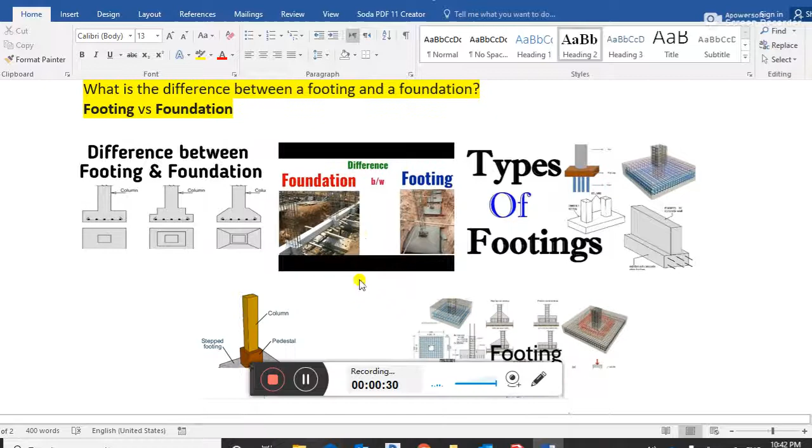Guys, today I also want to discuss a very important component of building construction called footing. This video is also very important, and as time goes on, this becomes a very interesting topic. Let's talk about footing. What is footing?

Footings are an important part of foundation construction. They are typically made of concrete with rebar reinforcement that has been poured into an excavated trench. The purpose of footing is to support the foundation and prevent settling. Footings are especially important in areas with troublesome soil.

Guys, we came to know about the definition of footings and its importance in the building. This is a very important element of the building. We should know this because most people mix up foundation and footings, not knowing the difference between the two.

Now it's clear the footing is an important part of foundation construction. They are typically made of reinforcement rebars that have been poured into the excavated trench. The purpose of footing is to support the foundation. Guys, this is an important term.

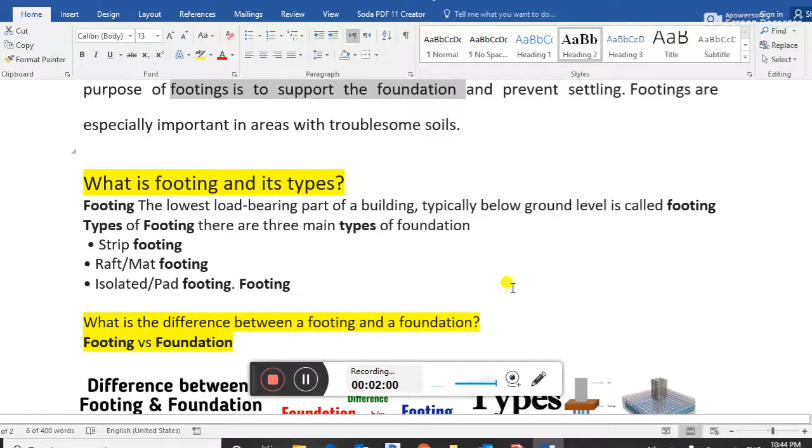What is footing and its type? Footing, the lowest load-bearing part of the building, typically below the ground level, is called a footing.

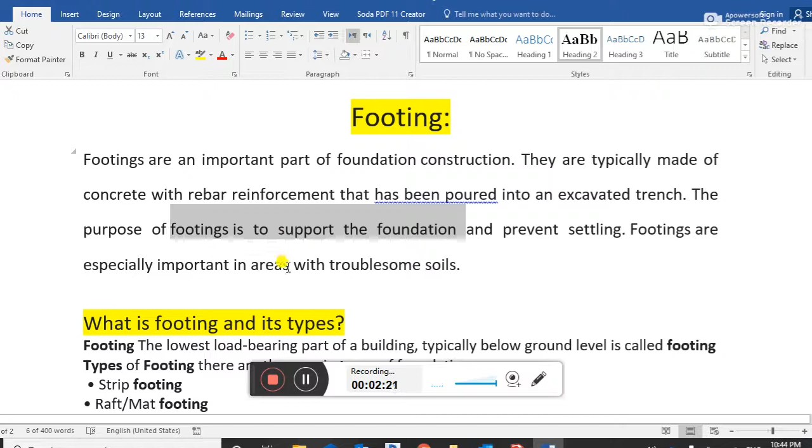As I previously talked, the footings support the foundation. This is also the lowest load-bearing part of the building, typically below the ground, called a footing.

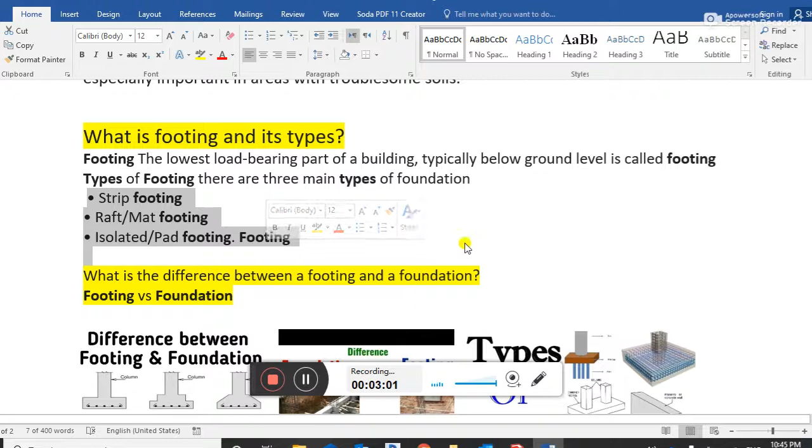Types of footing: there are three main types of footing or foundation: strip footing, raft or mat footing, and isolated or pad footing. Guys, these were the three types of footings - strip footing, raft/mat footing, and isolated or pad footing.

Guys, what is the difference between footing and foundation? Or in short, footings versus foundation difference.

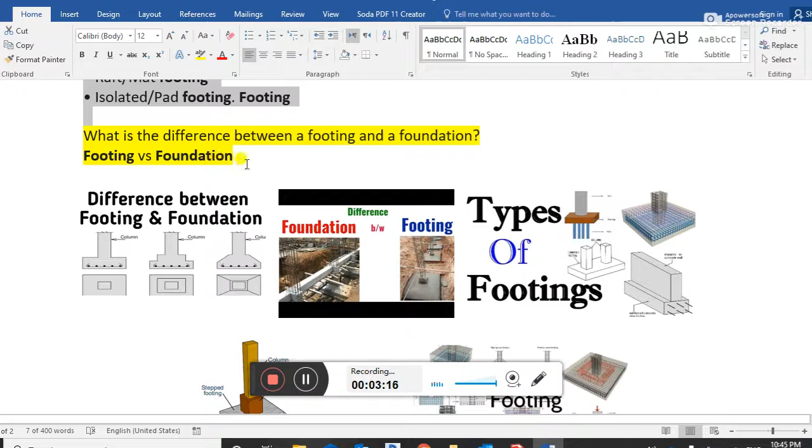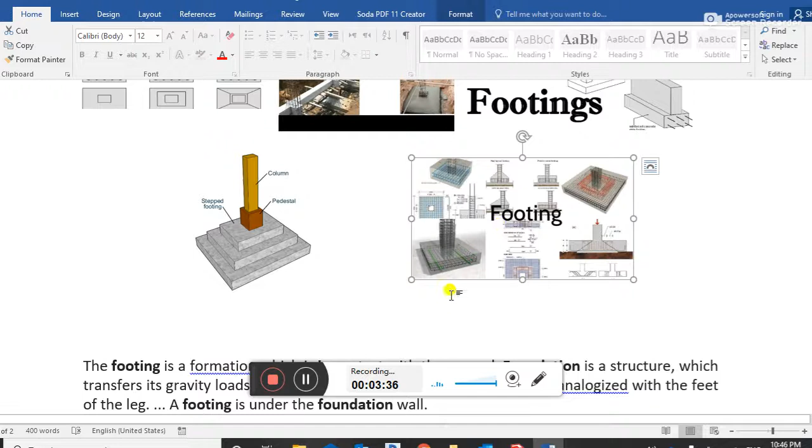Guys, as you can see here, this is a stepped footing, like a stair, stepped footing. This is pedestal, column, pedestal, and this is a column. This is also an illustration of footings, you can see here.

This is a footing, this is also a footing - all three. Here we have types of footings. See, this is a footing, this is also a footing, combined footing. This is all our footings.

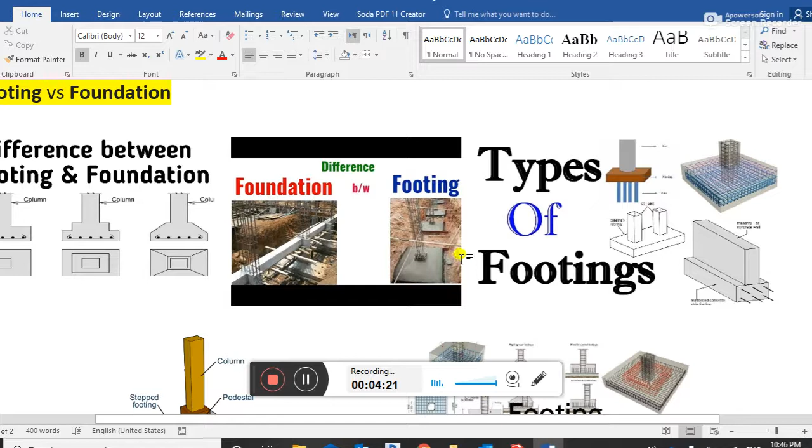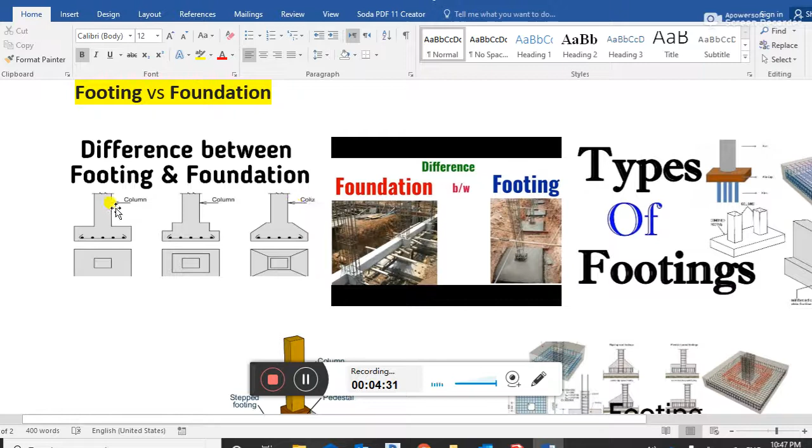This is the difference between footing and foundation. This is footing, guys, and this is foundation. Footings are support for foundation, as per definition. We can see this is a column and this is the footing.

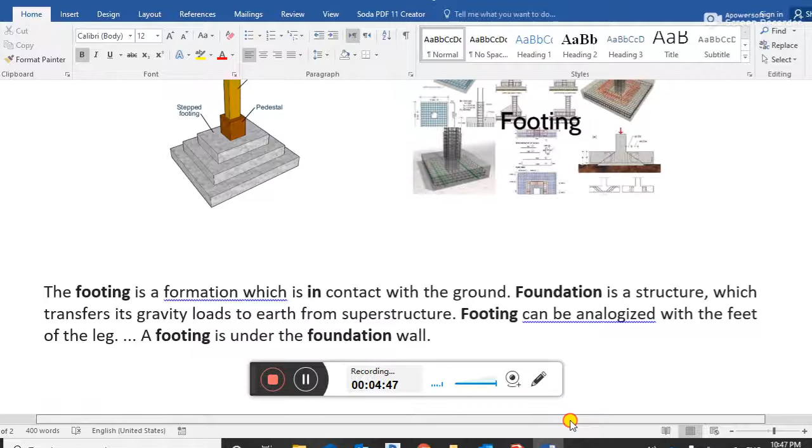Guys, we jumped into another part, which is: the footing is a formation which is in contact with the ground. Foundation is a structure which transfers its gravity load to the earth from the superstructure.

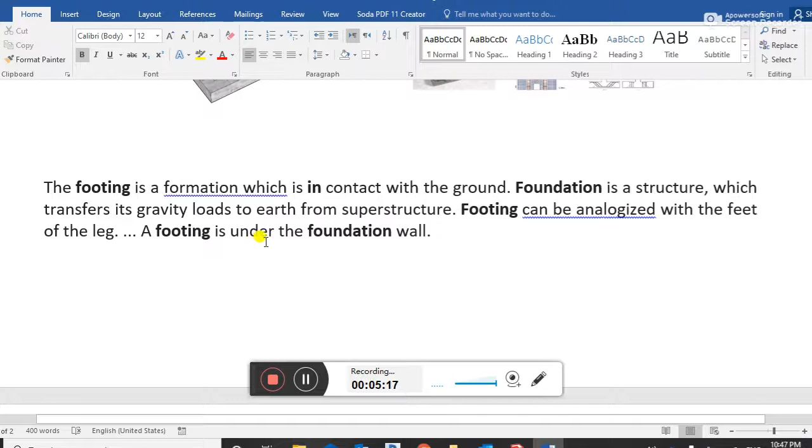Footing can be analogized with the feet of the leg. A footing is under the foundation wall.

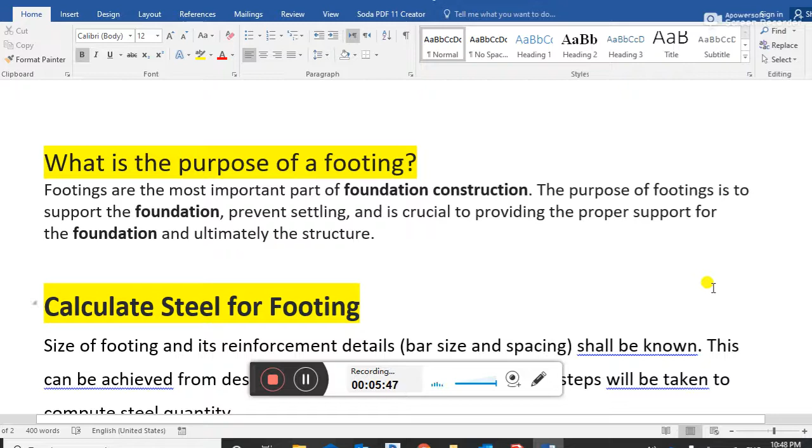Guys, what is the purpose of footing? Footings are the most important part of foundation construction. The purpose of footing is to support the foundation, prevent the settlement, and it is crucial to providing proper support for the foundation and ultimately the structure.

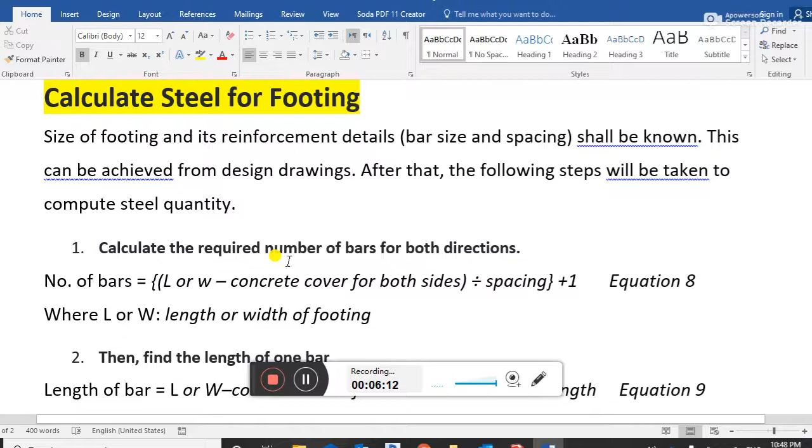Guys, calculate steel for the footings. The size of the footing and its reinforcement details, rebar size and spacing, shall be known. This can be achieved from the design drawing. After that, the following steps will be taken to compute steel quantity.

Calculate steel quantity. Calculate the required number of bars for both directions. Number of bars equals L or W minus concrete cover for both sides, divided by spacing, plus 1.

This is the main and important equation, guys. Number of bars is equal to L or W - for the length or width of footing - minus the concrete cover for both sides, divided by spacing. For example, somewhere it's 20 centimeters, somewhere 15, 25, or 30, depending on the structure and type of footing. Divide by spacing plus 1; this gives where L or W is the length or width of the footing. Then find the length of one bar.

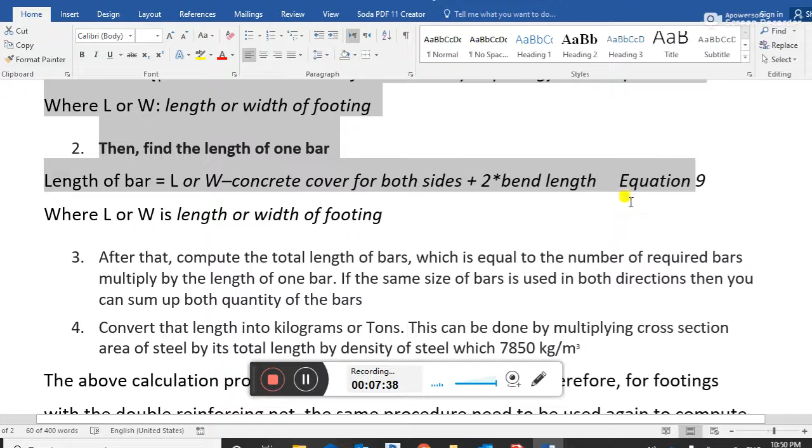How to find the length of one bar? Length of bar equals L or W minus concrete cover for both sides, plus 2 times bend length. This is another important equation, guys - this is length of bar, and this was the number of bars.

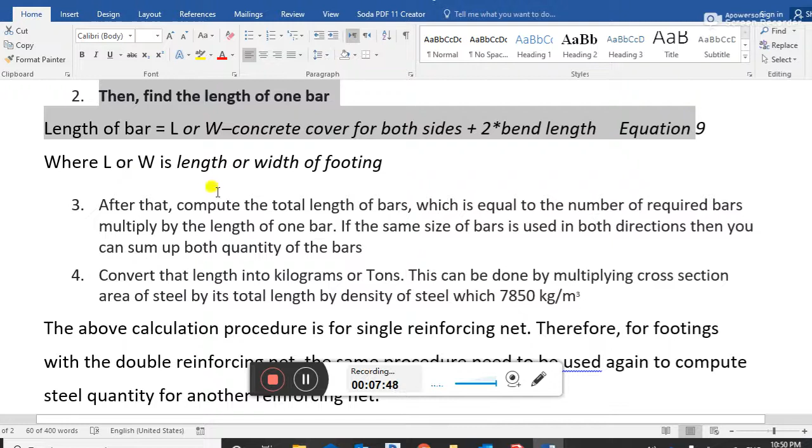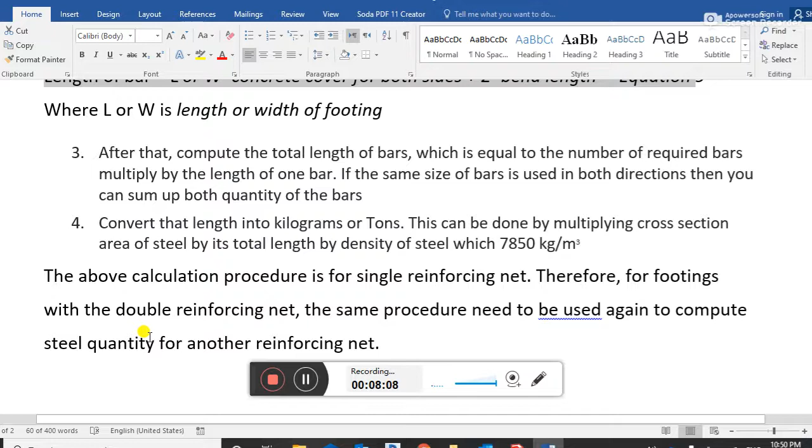Guys, after that, compute the total length of bar, which is equal to the number of required bars multiplied by the length of bar. If the same size of bar is used in both directions, you can sum up both quantities of bars. Convert the length into kilograms or tons.

This can be done by multiplying the cross-sectional area of the steel by its total length, by the density of the steel, which is 7850 kilograms per cubic meter.

Guys, this is a very important question, asked many times in exams and interviews: what is the density of steel rebars? Density of steel is 7850 kg per cubic meter.

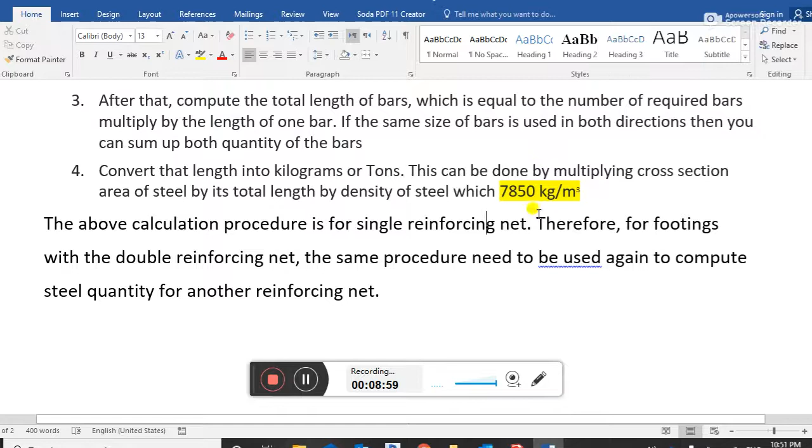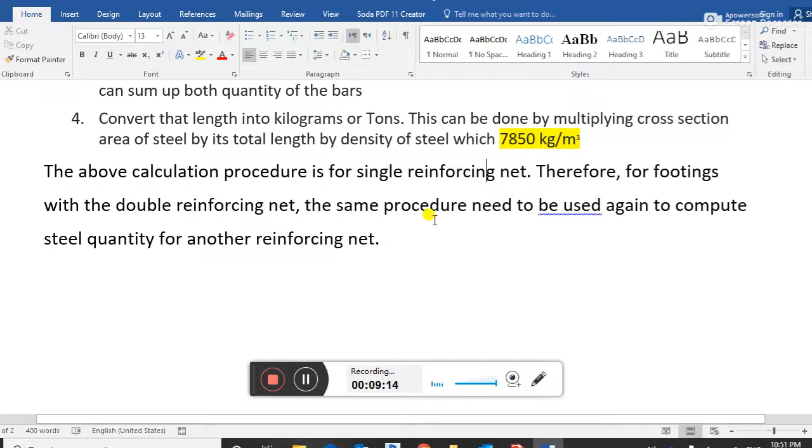It means one cubic meter of steel weighs 7850 kgs. The above calculation procedure is for single reinforcement. Therefore, for footings with double reinforcement, the same procedure needs to be used again to compute the steel quantity for the other reinforcement.

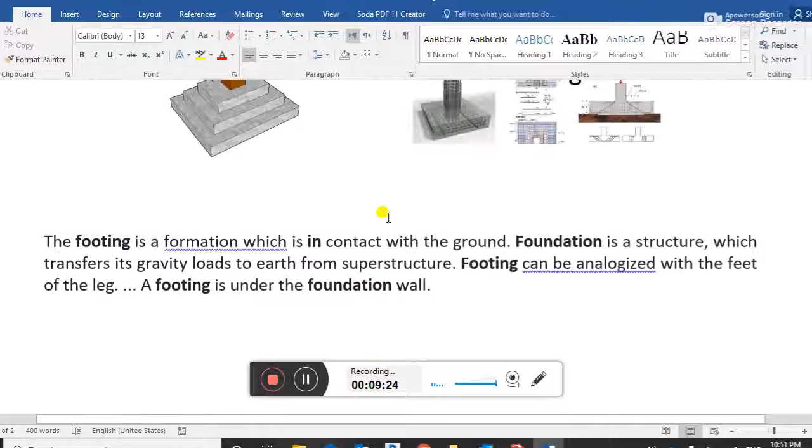Guys, this was a quick introduction on footings, types of footings, purpose of footings, and the difference between foundation and footing. We discussed each and everything here.